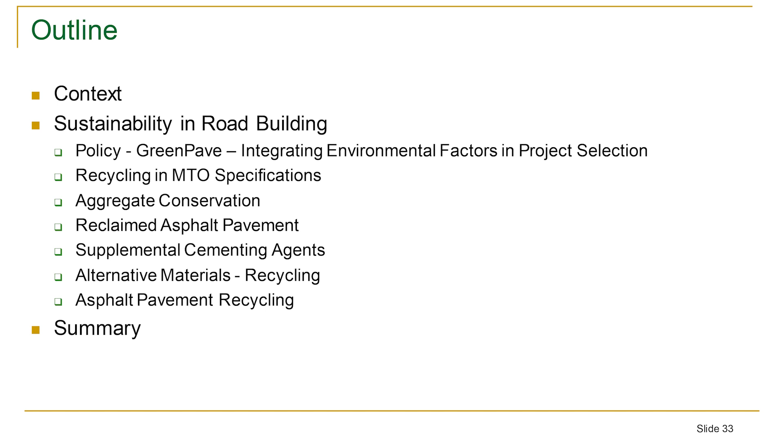I guess today's presentation I'm actually giving an overview of the ministry engagement in recycling, and that effort basically has been ongoing for probably about 30 odd years. I know my first project when I was in Ottawa, Carleton, that's about 40 years ago, when we did in-place recycling. So the reuse, recycle, and reduce has been ongoing for about 30, 40 years.

In the ministry, we lately just formalized in the last 3 years or so, a multi-ministry get together, and we are looking at ways to do low carbon procurement. By doing low carbon procurement, what that entails is that you now have to look at life cycle costing, and you actually have to look at the environmental aspect of it in order for you to get to low carbon procurement.

In the ministry, the transportation department has been quite progressive in the sense that we actually have used green rating of projects that we do for more than 10 years. The system that we use is actually GreenPave. GreenPave is a technology, a method we use to rate different projects.

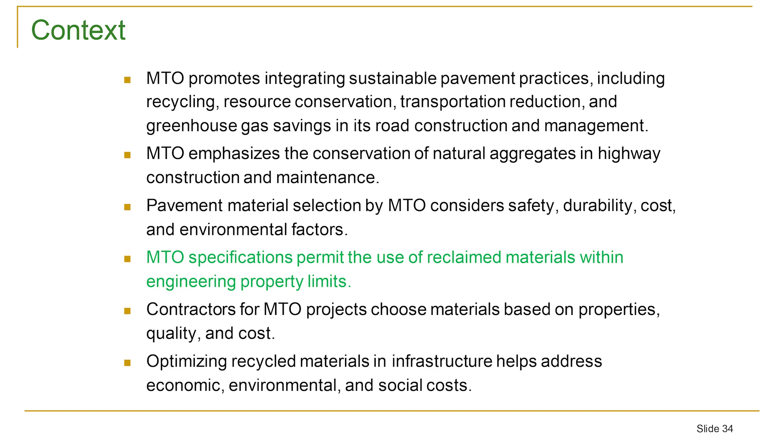By looking at both the emission reduction, recycling, and carbon footprint itself and innovation, we actually will select that project above and beyond just the lowest cost. In fact, for projects with an equivalent different strategy, plus or minus 10% of the cost, the strategy that has the lowest carbon footprint or GreenPave rating will be selected over the other project, plus or minus even 10% of cost.

So it's not just equivalent. We are actually paying a premium for selecting a project to design and construct it in a more environmentally friendly manner, and to that itself, generally recycling is a big component, because if you recycle, the transportation costs, the carbon footprint related to trucking and all those things get reduced.

The energy used for basically crushing all that raw material and everything gets reduced significantly. And if you do it in place recycling, you are much more further ahead.

So in that sense, the ministry actually, at the project design stage, is already mandated that we need to look at different alternatives and which one actually gives the lowest carbon footprint, and that actually is the selection, plus or minus 10% of life cycle costing of all the other alternatives.

So in principle, the policy is already in place whereby low carbon procurement is in place. Then once you have that kind of policy in place, then we start to look at what we need to develop in standards and then specification.

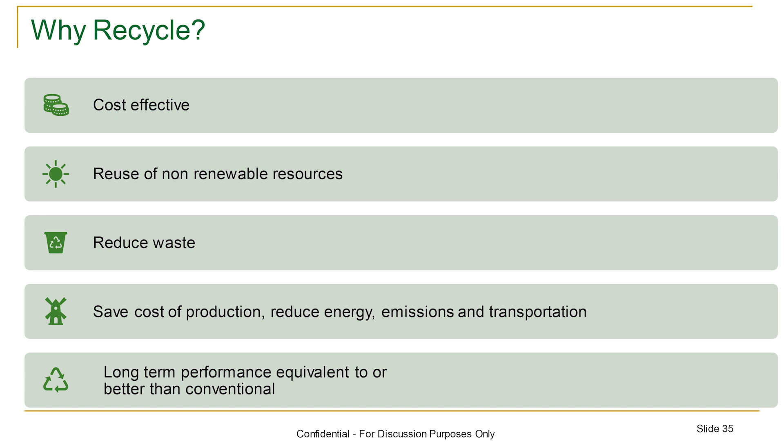We are getting material from USA, and some of our aggregate are shipped from Quebec. I think if we look at a different way, we can reuse and recycle materials, which will limit some of these huge transportation costs and distances associated with some of the projects the ministry is doing.

Other than that, in the overall ministry, when we look at sustainability, cost is just one factor, but we also rate the environmental impact using the Green Pave rating system, because that gives us a real quantification of the benefit of taking this extra step. We would even pay up to a 10% premium on a project to enforce a more environmentally sustainable option at the design stage.

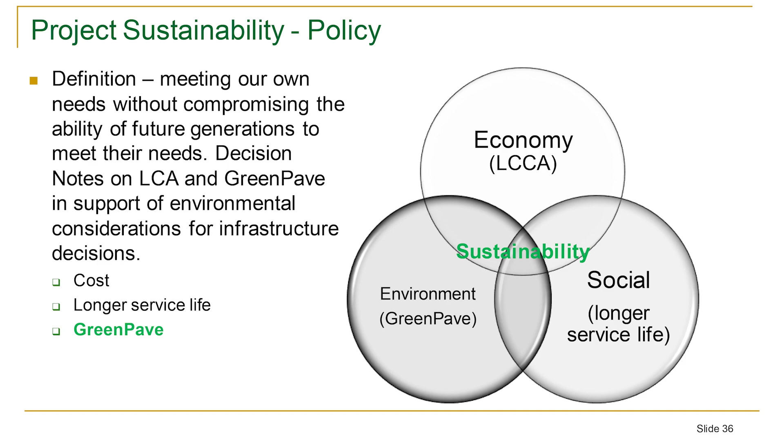Then during construction, if there's innovation, at MTO contracts generally once we specify something for you to construct, if you have other innovation you can always suggest it back to the ministry, and we will evaluate what the benefit is to the ministry. If there's cost saving, there may be a split in the savings. If there's no cost saving but it's environmentally more beneficial, you will likely get approved to use the alternative. So even though our specification is set in a certain way, once you win the contract, for innovation you can always approach the ministry and we will evaluate it.

As indicated, Green Pave is a system we use. It's based on Greenroads and GreenLITES but adapted to Ontario conditions. Based on that, we look at multiple facets of the project, such as greenhouse gas emissions and material reduction. Based on all that rating, we give a project a certain rating in points.

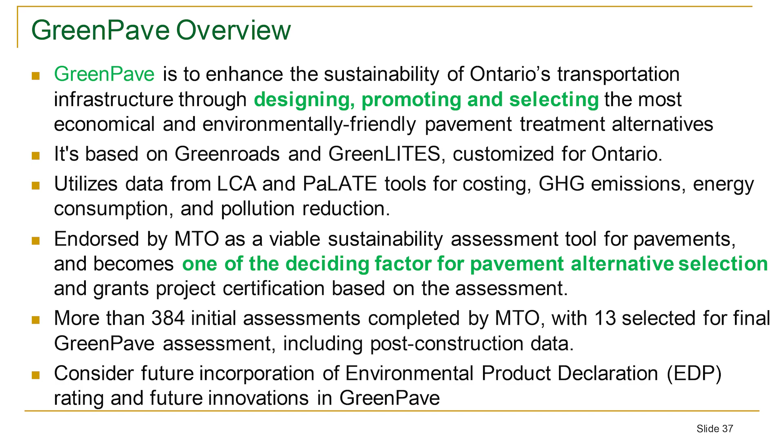As I indicated, the key here is that it's not the lowest price that wins. In fact, price plus or minus 10%, but with the best Green Pave rating, will be the project selection. That will further enhance environmental practice at the ministry in road construction.

Green Pave has now been implemented at the ministry for roughly more than 10 years. The next version of it is going to come out in the next 1-2 years. We are still in consultation with both the asphalt industry and the concrete industry, because these are the two main industries that provide input into our Green Pave.

At the ministry, one process in our bidding is that for a lot of the major projects, we allow what we call AB bid environment, which means you can bid a highway construction as a concrete or asphalt alternative. Because of the AB bid criteria, life cycle costing is definitely one of the major factors used, but the Green Pave on top of it is what we use internally. Although contractors doing a lot of these major projects will be doing it under an AFP environment where they make most of those decisions.

But if you drill down to the specifications we attach to those contracts, it will also lead you to selecting something more environmentally acceptable to our ministry, because it is inherent in our spec. We are driving you in that direction whether you like it or not, because although there is a certain leeway for you, a lot of the specification, in order for you to comply with it, will lead you to something that is environmentally more acceptable for the ministry too.

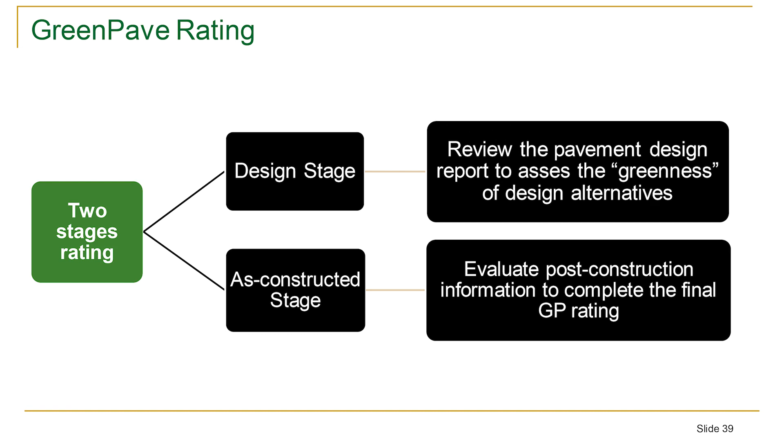We will do an initial assessment of what the green pave rating is based on just the theoretical design itself. But in order for the green pave to be more encompassing, you need to consider that what you design is nice on paper and in drawing, but what the contractor constructs may not be exactly to your drawing and specification. So based on testing and sampling of what is actually constructed, we go in and re-rate the green pave.

There are a number of components that are construction-based data. Based on that data, we input it in. So I can give you a project's initial design stage rating, say 80 out of 100, and after construction, the other 20% mark will be added to see the real final rating of that project.

Because in order to do the real nitty-gritty after construction, it's a much more involved stage. In terms of the green pave rating system, I come from a background after leaving the private industry. I actually started 7 firms doing carbon credit in Asia.

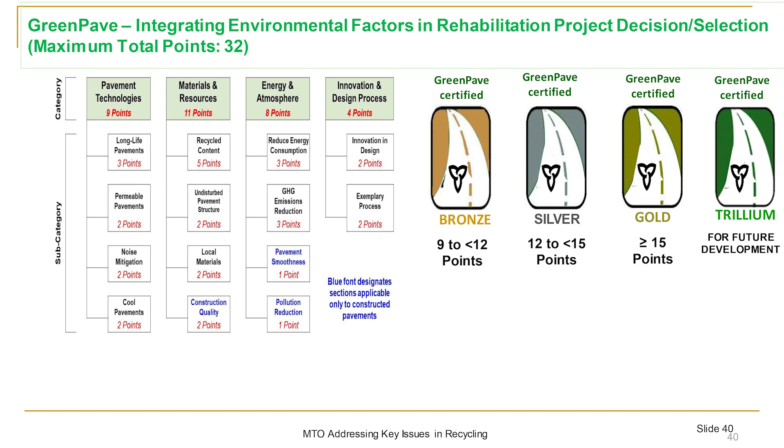So I guess in that sense, this is the aspect of why I'm saying that the moment you actually have a carbon asset attached to a project and you can monetize it, that totally changed the life cycle costing and the project initiative. What if I tell you this $1.2 million project itself has, let's say, $500,000 worth of carbon footprint that you can get back? Well, you just have a reduction of $500,000 in price, especially if you are on the owner side.

Because generally, the carbon business itself is whoever owns the carbon right can monetize it. And in this case, a lot of projects belong to government entities. Technically, all they have to do is get a certified consultant that certifies this is the real reduction in carbon. That piece of paper now you can actually sell it to any of those polluting companies that have a lot of pollution that they want to reduce their carbon footprint.

And that is how basically in theory some of the major polluters can get to net zero. It's like they are buying pieces of paper that other people are reducing carbon footprint to use that to reduce their carbon footprint.

Because of that, I think it is quite an interesting concept that the ministry have gone this route, whereby we are quantifying emissions and rating the project itself. I think that will lead a lot of the other government agencies to look at, is this one way that we can help to finance a project itself?

Because if for a certain project you have very high tonnage of raw material that you have to import, by using recycled material your footprint will reduce tremendously. As most people know, if you want to crush aggregate, there's a lot of energy involved, and to produce the hot mix itself, there are carbon footprints associated with all these different components. If your carbon footprint is big enough for that project, there is significant dollar value attached to the carbon component, which most agencies have not even looked at to monetize.

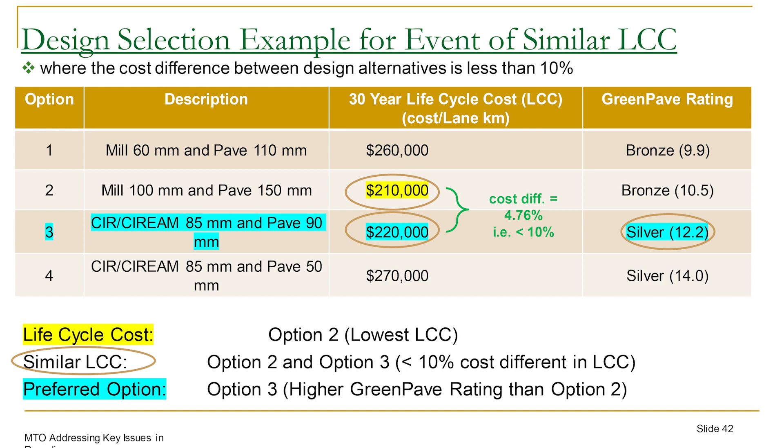This is just an example where we show the one in blue itself. If you look at it, the life cycle costing is higher, but because the environmental rating under GreenPave is better, we actually select that alternative on that project rather than the one with the lowest life cycle costing. So that is actually how this translates to the environmental impact. The higher impact itself actually translates into how we select that project.

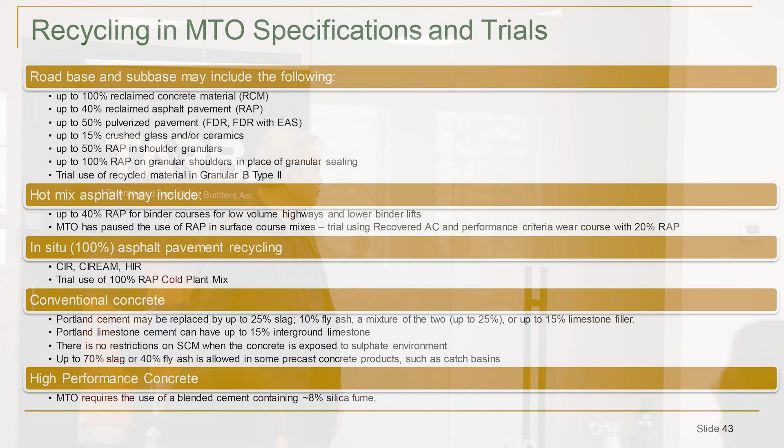As discussed before, at the ministry we have been quite an early adopter in actually using recycling. In aggregate, there's a number of specifications that we allow and the percentage of how we allow recycling, in asphalt, in concrete. Basically all the material that we use in construction of the roadway, there are specifications related to it that we actually allow the recycling.

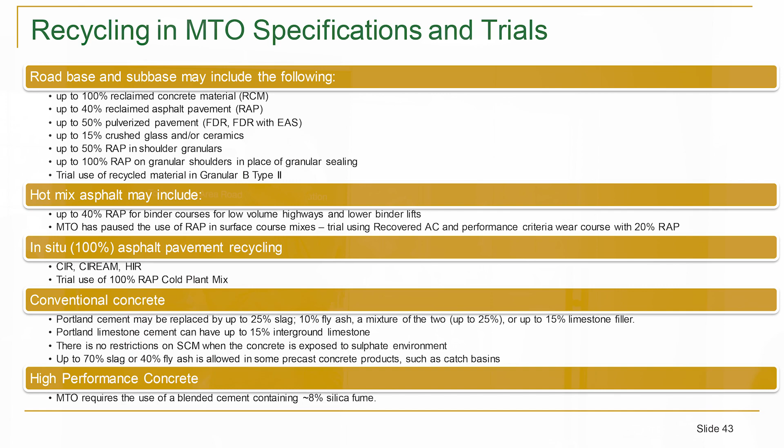And it is an ongoing learning experience even for the ministry, because with newer technology and newer material that start to evolve, the percentage of what we allow also evolves. In terms of recycled concrete, of late we actually allow 100% recycled concrete on some projects as a trial NSSP, so we learn from that, and based on that, determine if we need to modify further before we make it go into the mainstream spec.

In cold asphalt technology, I'm heavily involved using 100% RAP itself to form 100% cold plant mix. What I've been approached with is that a lot of plants are saying, Stephen Lee, asphalt plant RAP pile is growing like crazy, what is the way we can actually use it? My assumption is that if you're in the industry, you want the highest value for that RAP. Technically you can put it into a hot mix.

But hot mix in MTO is very stringent. Our surface course requirement is almost impossible to meet with RAP, because if your RAP pile gets contaminated with any other material, you cannot use it on MTO surface course, since our surface course is designed to have very high frictional property, which can only be granted using virgin aggregate most of the time. When you're at very high speed and you don't have the friction, it's a bad combination, and the liability is way too high.

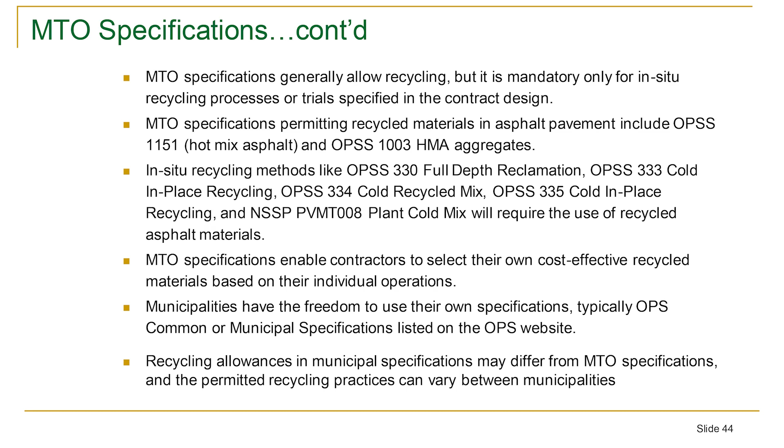To be fair, at the ministry, as indicated by some of the municipal engineers here, the scale of our project is much larger, but when you're at a smaller scale, you actually have to modify the spec to suit your need, because you may not be able to do what we are doing since the scale is different. Timing afforded to us may not be afforded to you.

I can afford to wait 1-2 weeks for the test, because my project is going to be 1 year long or 2 seasons long. I can afford to wait a month for the result to come in before making a decision. Whereas if your project is only 1-2 months in cycle, waiting 1 month for a result and making a decision doesn't make it very manageable.

So those are some of the adaptations that I think a lot of you will have to look at based on your environment setting and based on what the ministry can or cannot do, and the project of scale have a different potential — you can do things that you may not be able to do if your scale is not there.

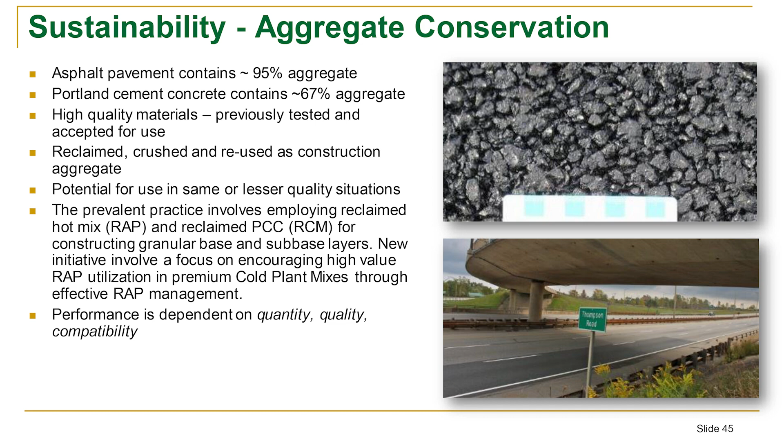In the ministry, for aggregate sustainability, we now look at different ways that we can recycle aggregate itself. For recycled concrete, the ministry now literally allows 100% recycled concrete into our aggregate. Even for Granular B type 2, which we used to specify as 100% quarry crushed aggregate, we are starting to experiment with introducing recycled concrete into some of those projects on a limited basis, because we realize sooner or later we have to transition into that.

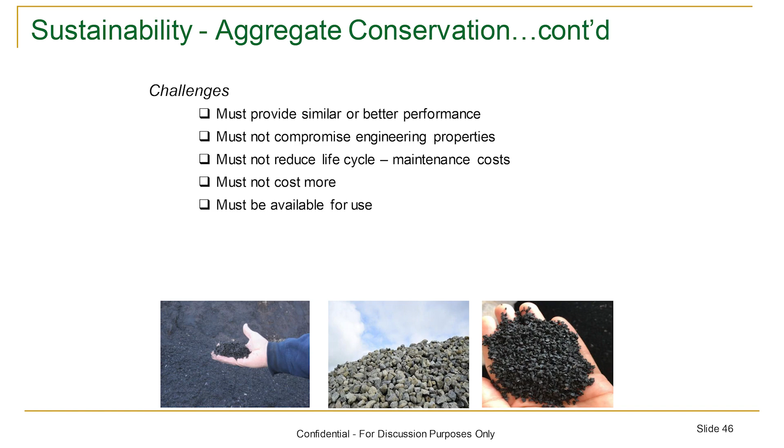Aggregate conservation is a big thing, because ultimately, some of our projects have aggregate barging from the US through Hamilton Port. That is not very sustainable. On some projects we are shipping aggregate from Quebec to our 400 series highway project in western Ontario. That is also not very sustainable, with all these hauling trucks coming from Quebec to supply the aggregate. Because of that, we are really looking at whatever way we can to minimize the use of this, since premium aggregate is actually in short supply.

We are actually going further to get the premium aggregate for our application. As I say, on the ministry's 400 series highways, you want the best possible premium aggregate, because there's 400,000 cars on the busiest part of the 401. If you have potential for accident in terms of friction property, that is the worst place you want to have a problem. That's the reason why for a lot of ministry applications, the 400 series highways have very high aggregate requirements, which doesn't lend itself as much to recycling because our friction demand is very high.

And there's already a directive on some highways where we are increasing the speed from 100 to 110. The moment you increase the speed, with volume, you better have a pavement with very high friction property. But due to climate change, these are also coming into play.

What we are seeing is that the rain is coming down at such high intensity. Total quantity is the same, but it's coming down at such high intensity that the water doesn't run off completely off the highway, and you have minor ponding. When you have minor ponding on your road surface, friction doesn't matter anymore because your tire is actually floating on water, not even touching the pavement itself. That's a totally different phenomenon.

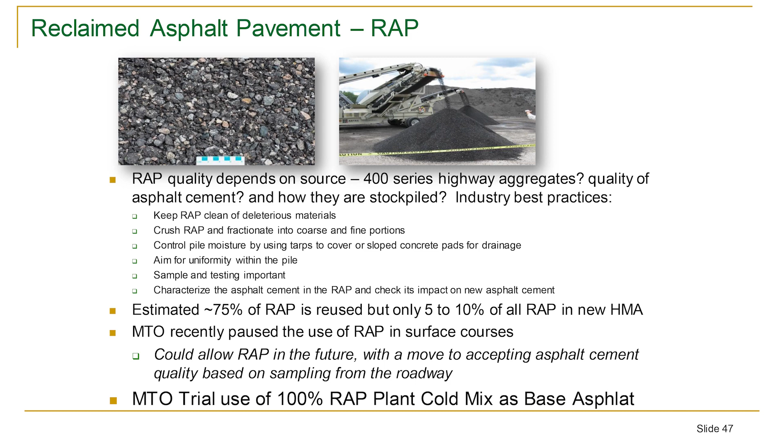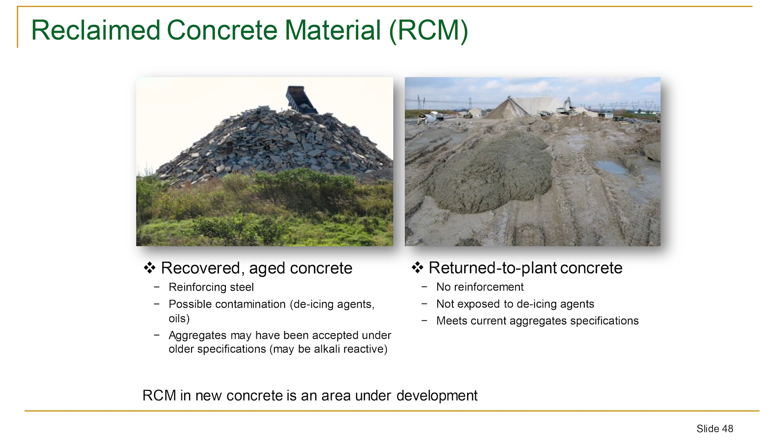There are a lot of differences in the sense that with in-place recycling, you're straight away recycling the ministry highway where we know the quality of that asphalt is a certain amount, as long as I don't go into the base layer. Whereas with plant mix, it's all depending on the RAP pile you have and how you manage that RAP in order to come up with a design that will meet all our specifications. So that's actually the new area we're delving into.

As I said, reclaimed concrete—we have been doing it for quite a while, and right now we're trying to open it up to more applications, even looking at 100% reclaimed concrete application, with some additional testing and quality assurance.

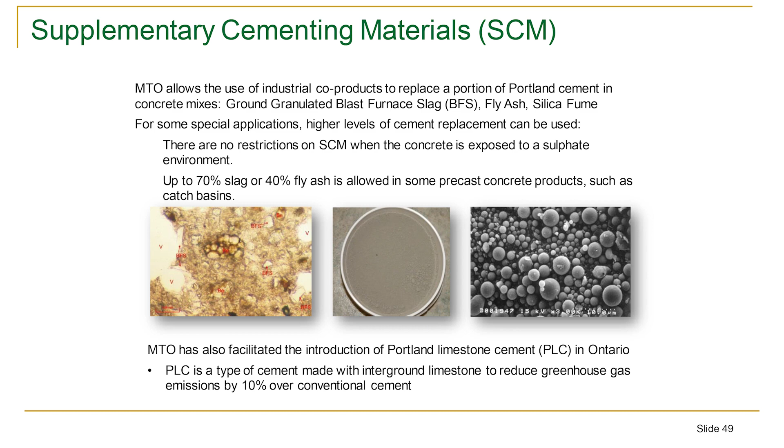Supplementary material—the ministry is also looking at other uses of ceramic, glass, tires. So in that sense, we are actually open to looking at recycling materials to basically aid the reduction of some of these materials that, if you don't use them, will need to be landfilled, and that's actually a significant cost.

If we can use it at limited quantity and still control the engineering property—the overarching principle at the ministry for how we look at any material for engineering purposes is that as long as I define what the engineering property for that road or highway needs to be, we are open to looking at any other option to change it, as long as the engineering property is still preserved. That gives me the assurance of durability, the assurance of safety, the assurance that life cycle costing makes sense. But on top of it, if it's also environmentally sustainable, that would be a plus.

Rubber tire—on one project, we actually used 400,000 tires on two embankments. The challenge with that is you'll be shocked, because we used 400,000 tires on that project, and the project was thinking of sourcing additional tires from the US because they could not supply all of those from the one pile they had. That, to us at the ministry, is not acceptable, because we want your tires to come from Ontario. I don't want to basically recycle US tires on my behalf on our roadway.

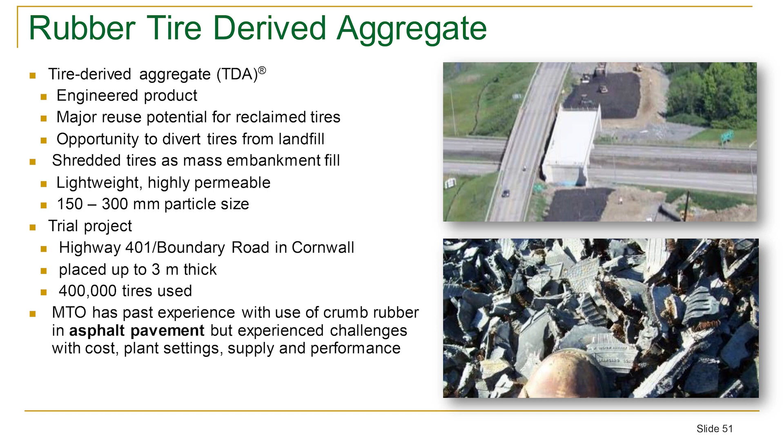As with any trial, sometimes you face challenges, but this technology has also changed tremendously. The initial tire shredding was mechanical shredding. As we speak right now, they are using cryogenic shredding of the tire, which means they freeze it to a very low temperature, then drop it or hit it, and it will shatter.

Whereas initially we did mechanical shredding. If you mechanically shred the tire, especially since a lot of our tires contain steel wire, it's a challenge to get the gradation and quality that you want. That's the reason we've slowed down the use of tire-derived aggregate - unless we know a producer can produce the quantity we want, it impacts our project deliveries. Halfway through the project you run out of the tire pile, and then we have to negotiate where those tires are coming from - is it from the States, Alberta, or Quebec? We have a problem.

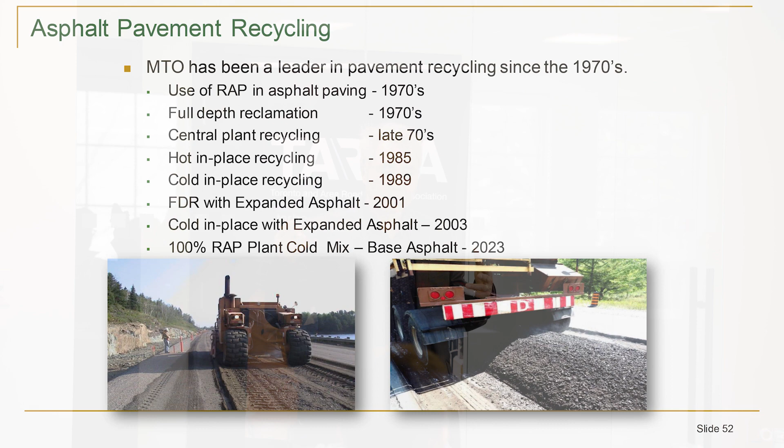In terms of asphalt pavement recycling, the ministry has been at it for almost 40 years, and a lot of the in-place recycling and hot mix recycling has been well established in the OPSS. We are looking at using a newer generation of testing to quantify the asphalt itself, because right now the normal asphalt pavement design works well for virgin asphalt binder. The moment you have aged asphalt binder, the test methods are not the best, and it's very hard to do mix design and final end-product quantification of how long it will last. It's not as simple.

Can be done to some extent, but we need improvisation of the testing method. We are looking at nuclear methods of actually looking at the molecular level to see how it is going to age. We are using quite a lot of new technology to augment the current technology. A lot of it is based on nuclear science, because with nuclear physics you can actually look at the material particle or chain at a molecular level to see where the oxidation or change in state happens, whereas our traditional chemical testing cannot quantify those things as gracefully. These are areas of research the ministry is doing, and I'm also doing a lot of that research for in-place recycling, the cold technology, using the nuclear method.

Right now a lot of asphalt recycling is not used at the surface wear course. The surface wear course has some restrictions, but binder course definitely is not a problem. For cold mix, we are changing things in the ministry - I'm mandating my pavement section designers that if it's a brand new highway, look at putting in cold mix technology asphalt as the first lift, and top it up with hot mix. That's the way we are designing the pavement.

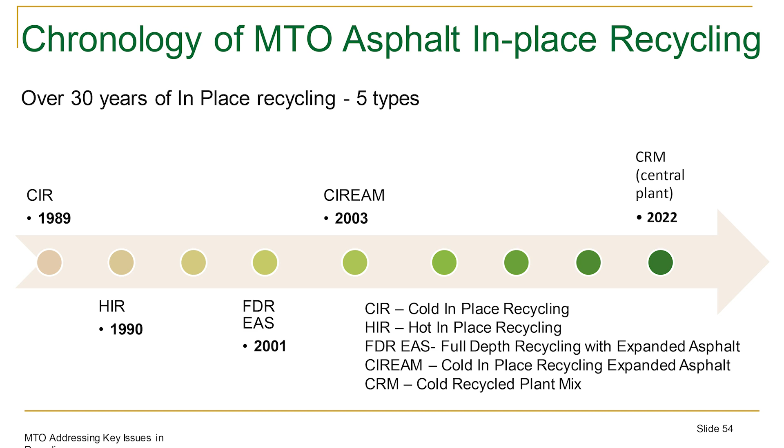In terms of in-place recycling, when I was in Ottawa Carleton, the first in-place recycling happened there. The next year, MTO started in-place recycling in 1989 - that tells you I'm probably around 40 years in this business. Sooner or later, it's time for the newer generation to take over some of this file. In-place recycling definitely has its place because it saves a lot of trucking and conserves a lot of material - you're using 100% of the in-place material.

Even with concrete, we are starting to look at rubberizing and other things for concrete pavement. The 401 in the whole of Toronto, from one end to the other in Central Region, the middle two lanes are composite pavement with concrete buried about 300mm below all the asphalt. But guess what - that concrete is now 60 to 70 years old, and all the joints are probably shot. If you just shave and pave the asphalt off, the crack is going to just reflect right back up on you, because the concrete joints are actually the problem, not the asphalt.

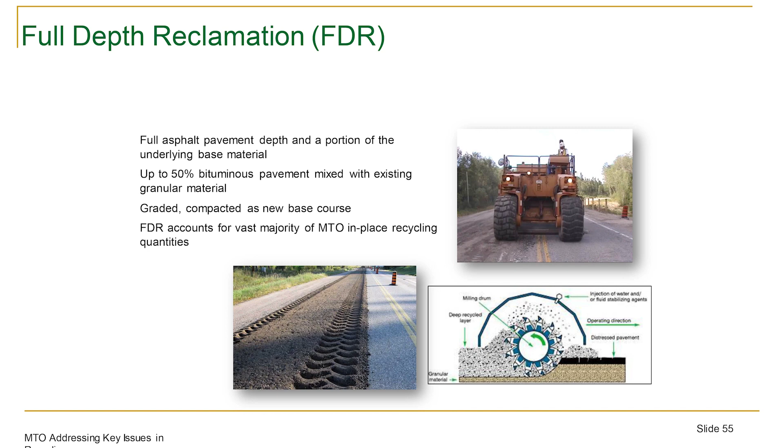At the ministry, one of the most environmentally friendly in-place recycling methods is full depth reclamation, where we pulverize the material to become 50% RAP, 50% granular. Cold in-place recycling is where we just recycle a layer of the hot asphalt itself and turn it into cold asphalt, then top it up with hot mix on top.

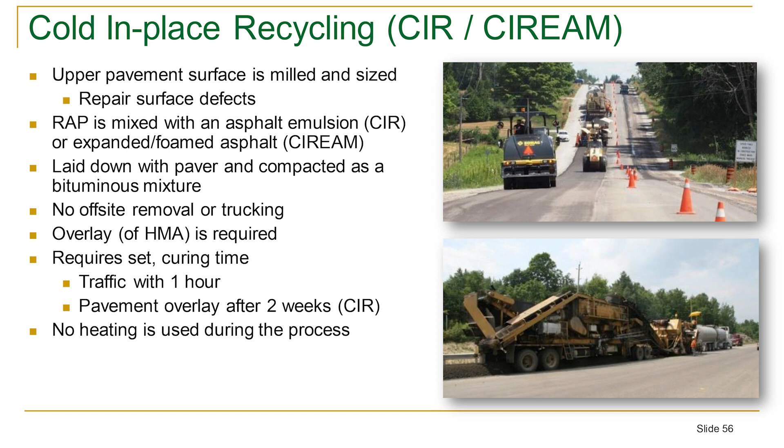Because of the knowledge we gained from cold in place recycling that we've done for the last 30 years, I'm actually doing cold plant mixes, because what we're finding is if you put hot mix on top of cold mix, it actually outperforms a pavement designed with strictly hot mix on hot mix. That's why I'm a strong believer in using the cold plant mix technology. It's identical to this, except in plant mix you're dealing with the RAP pile in your plant, whereas in in-place recycling, the ministry highway, I know exactly what my surface course is. That's the major difference, and that's one area we need to work with industry on, to ensure they're willing to homogenize their RAP pile. Then I can see an equivalency.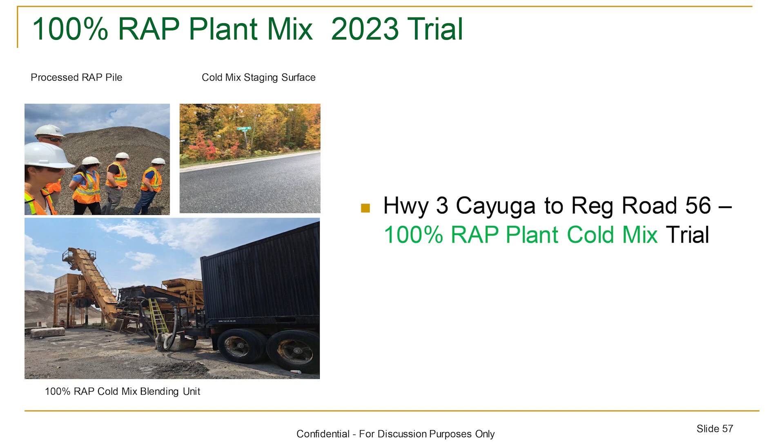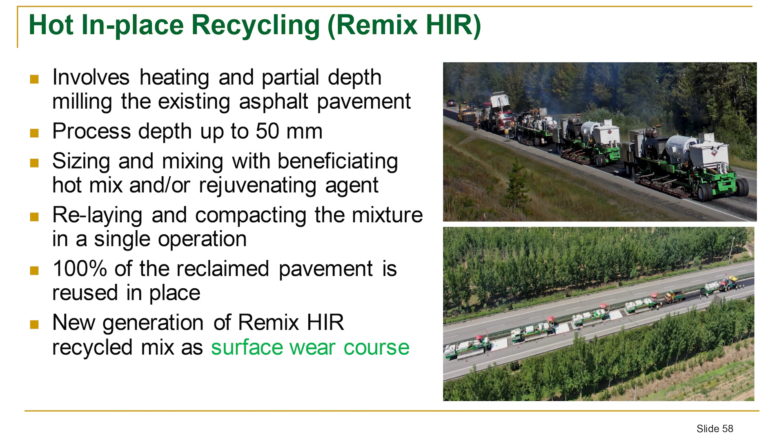Hot in place recycling - the ministry has gone back to it. 30-something years ago, I did quite a lot of hot in place recycling. But the hot in place recycling we did in Ottawa-Carleton is remixing hot in place recycling. MTO used to do repaving hot in place recycling. The major difference is that with MTO's repaving, you must put a lift of hot mix on top of the hot in place recycling. Remixing means I'm actually recycling your top surface layer of hot mix. It comes back as your surface wear course, which means I don't need to put the extra layer of hot mix on top.

Because of that, the cost efficiency is much higher. But also because of that, the requirement is much higher on your equipment - your equipment must weigh the RAP, must meter the rejuvenator, must meter the remixing admixture you're adding into the hot in place recycling in order to meet the surface course quality. We're asking you to meet surface course quality, not asking for a base asphalt. That's the major difference. But if done properly with the right equipment and technique, there's a huge cost efficiency, and the ministry is still pursuing this. We have some growing pains using older machines, but we hope to transition to the latest newer technology.

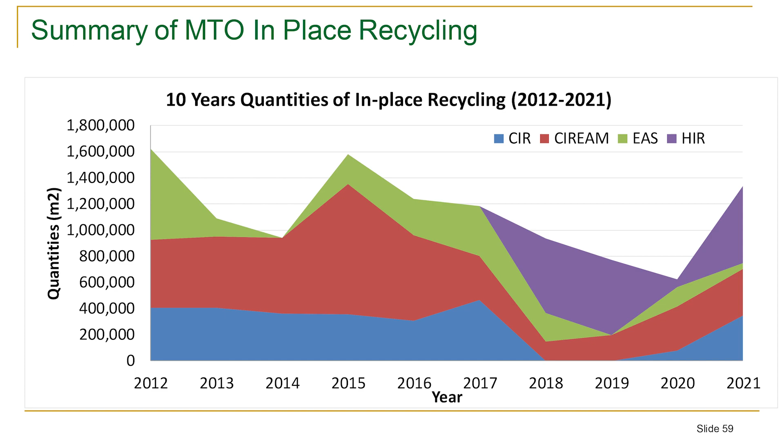In a nutshell, this is roughly the quantity of in-place recycling the ministry has done over the years, and a significant amount of our projects are actually done this way - 1-point-something million square metres a year of mix are in-place recycled, not including the other hot in place and hot surface course and other techniques we use.

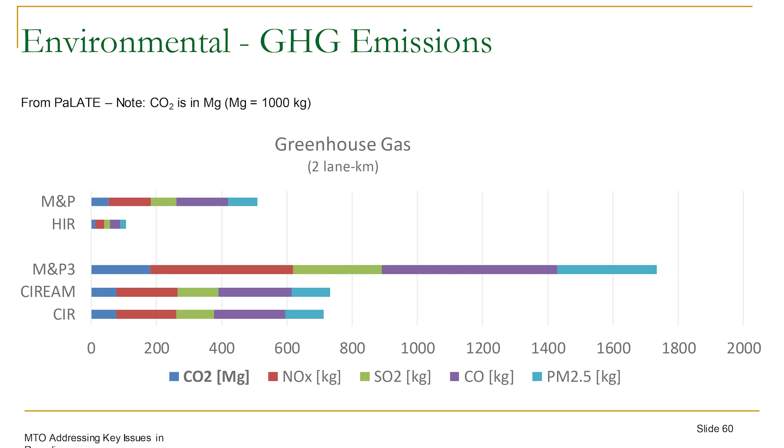In terms of environmental emissions, the ministry generally - when we do a project, this is actually 2 projects. The top 2 are 1 project, the bottom 3 are a different project. We use the PaLATE software, modified a bit, and calculate the emissions of that project. Based on that, we look at the 2 alternatives, mill and pave versus hot in place recycling, on the first project. Hot in place recycling definitely has a much smaller greenhouse gas emission. Then on the next project, mill and pave three lift, CIREAM, CIR - CIREAM and CIR have relatively the same carbon footprint, whereas the mill and pave three lift has significantly more greenhouse gas.

If you're the agency and you start to certify this, get a consultant to certify the carbon reduction - that carbon reduction, the federal government carbon pricing right now was $30 a ton before, but I believe it's going to increase to maybe 40 or 50, and higher still in the future. There are huge dollars attached to some of these projects if done properly. To be fair, as the agency, that will come back to your bottom line - the financing of the project will be much cheaper because you have this carbon asset, which if you don't quantify and certify it, that asset is lost.

I guess in a nutshell, I'm not going to go through this further. I probably can take questions. Thank you.